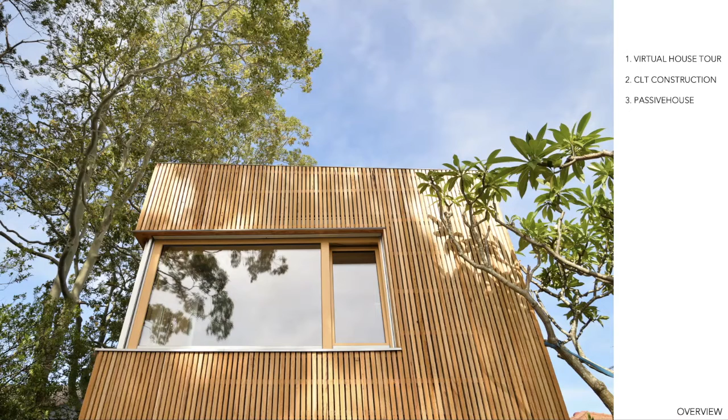In this presentation, I will first cover a virtual house tour of the finished project, then show you more detail about the cross-laminated timber construction, and then add all of the additional details which turn this house into a passive house. We start with the site.

The project is located in Balgowlah, northern suburbs of Sydney. As you can see, there's an existing house in the front, which is the 1920s Californian bungalow, and the addition has been installed in the backyard.

The form was very much determined by the need to retain the existing gum trees. You can see it's quite densely populated with trees. It is obviously been a bit of a challenge to fit the extension in there.

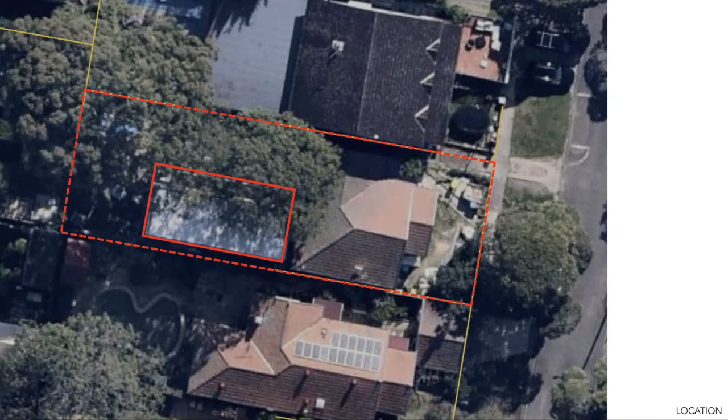The crane during installation was standing on the road, reaching over the existing house and then lowering all of the elements into the backyard.

Again, this is the overview of the site with the existing house at the front and the extension at the back. The extension is about 110 square meters.

On the ground floor, we've got the new main entry to the building with this little link which connects the old and the new part.

You've got the stair going upstairs, kitchen area, dining and living, and external terraces. On the upper level, we have the study and a bathroom, a walk-in wardrobe, and the master bedroom.

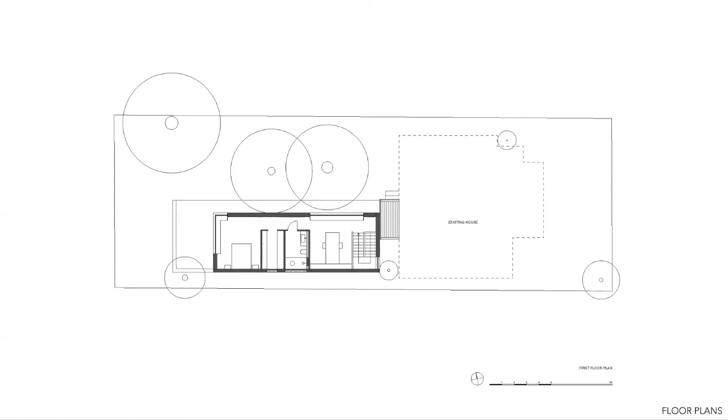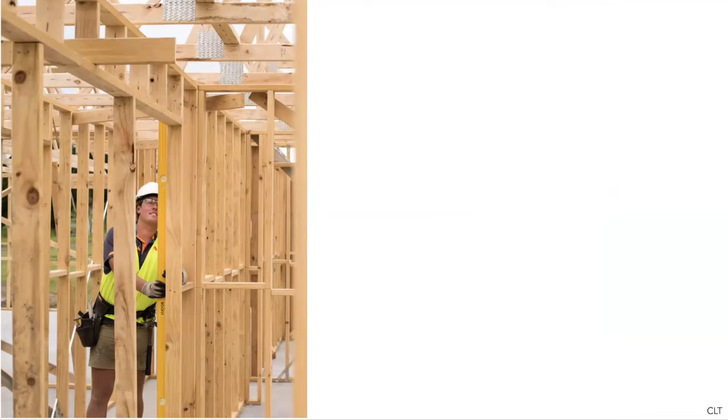Now I'm going to explain you a bit more about the cross-laminated timber construction. That was the method for this project. So everybody knows about timber framing as sort of a traditional residential construction, and everybody knows about concrete tilt-up prefabricated systems, which are sometimes used in commercial arrangements. And cross-laminated timber really is sort of a combination of the two systems.

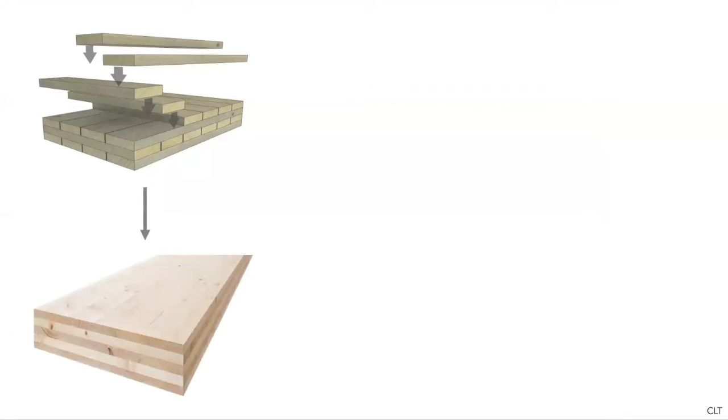So cross-laminated timber consists of timber boards which are glued together at 90-degree angles and then form a solid slab. This slab can be used in all different types. It can be pre-cut, windows can be added. We've got smaller elements, long elements, and they are then installed on site.

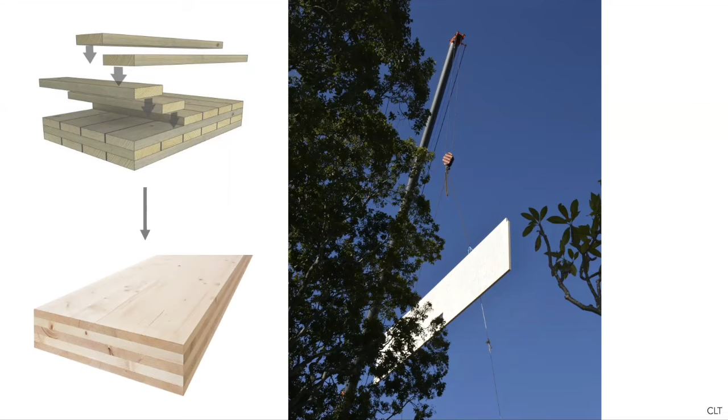This is a view of the crane lifting one of those 11-meter long panels over the existing house into the backyard.

So why did we use cross-laminated timber for this project? There are a whole lot of reasons to use that. Part of it is the quality of the finished product. It's prefabricated to a high standard in a controlled environment, and particularly in combination with passive house, this is of large importance for the airtightness of the building, in my view. So you can use the CLT as an airtight wall or slab or roof, and instead of adding an additional membrane to achieve the airtightness, you can tape the joints to achieve this.

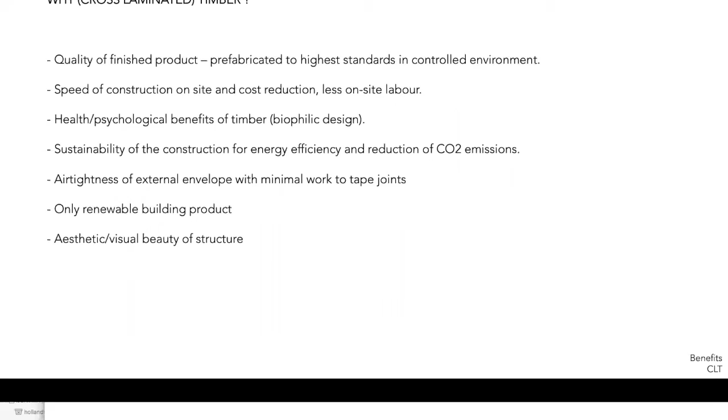So why did we use cross-laminated timber for this project? There are quite a few. Obviously, the quality of the finished product is prefabricated to the highest standards in a controlled environment, which in combination with passive house is very important if you think about airtightness. All of the CLT walls and slabs are airtight within themselves, so you only need to tape the joints to achieve the full airtightness here.

There's a speed of construction on site and associated cost reduction. There's less on-site labor. Obviously, health and psychological benefits of timber, generally thinking about biophilic design, the sustainability of the construction, both for energy efficiency, taking advantage of the timber's thermal properties, and the reduction of CO2 emissions. It's essentially the only renewable building product, timber. And obviously, there's also the aesthetic and visual beauty of the structure itself.

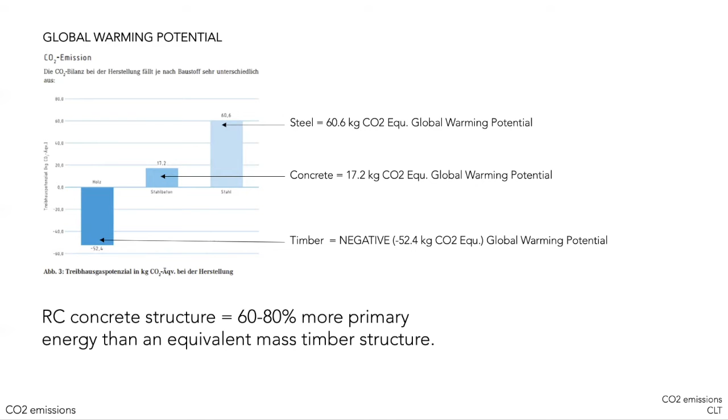If you look at the global warming potential of mass timber structures and compare that to more traditional structures, maybe not in the residential environment, but generally in construction, you compare it to concrete, a concrete structure of the same size, same type, would have 60 to 80% more primary energy used than an equivalent mass timber structure.

And then coming to the argument about transport, because the CLT that we've used here is coming from Austria. Transporting something 12,000 kilometers overseas on a ship in a container is the equivalent in CO2 emissions to transporting something above land with a truck. That just puts it into perspective overall.

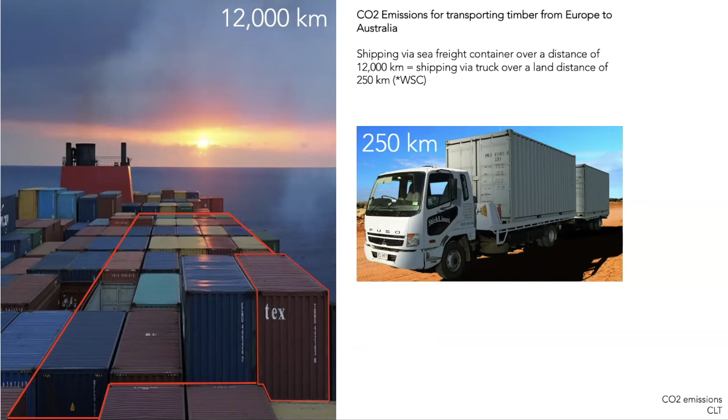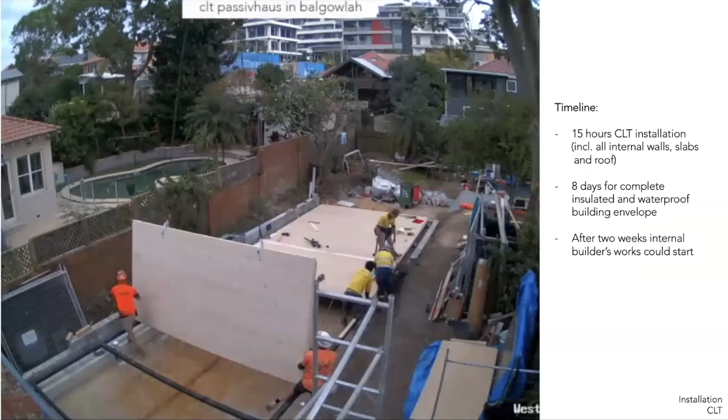This is now a time lapse of the installation of the Balgowlah passive house. You can see the floor panels put in place. There's a crane standing behind us, reaching over the existing house. You can just sort of see some tiles at the bottom left corner. So you can see it's pretty close to the boundary on the left side, and the neighbor was rather difficult, so it was really important to not pass over his airspace. And on the right side, you can just see the edge of those large gum trees. So very restricted site, but it went incredibly smooth.

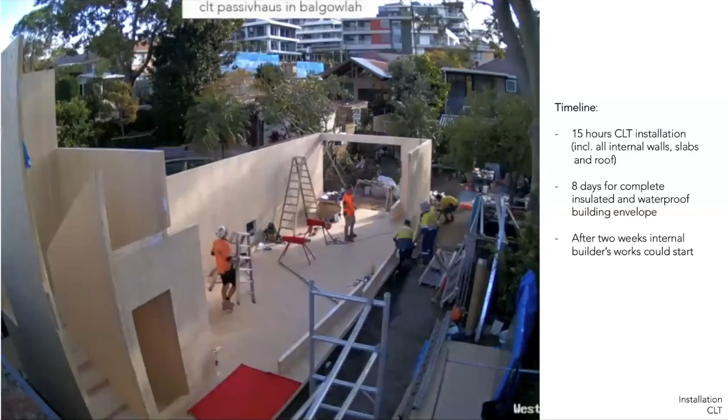You've just seen the large 11-meter panel being installed, and essentially the part that took the longest was the area around the stairs. So the stairs were prefabricated. Within the slabs, we also had the prefabrication for the conduits. The lighting cutouts were already included, and now you can see the next level going up. The whole structure was installed in 15 hours, but spread over 2 days because of council regulations and the time that it takes to set up the mobile crane and pack it all away again.

Overall, after 8 days, the entire structure was complete with the insulated and waterproof membrane installed and ready to essentially go into the interior and start the external cladding after 2 weeks.

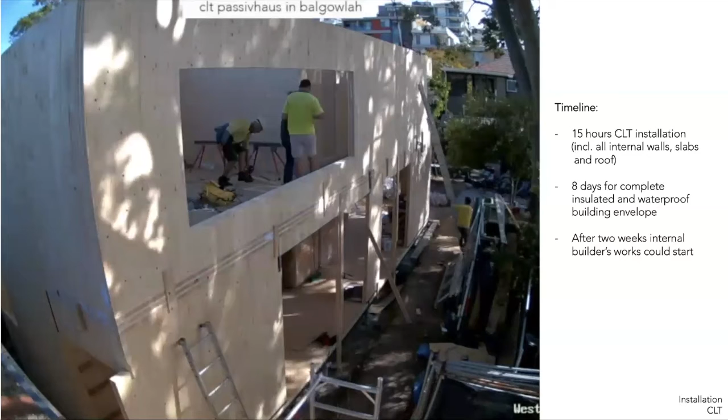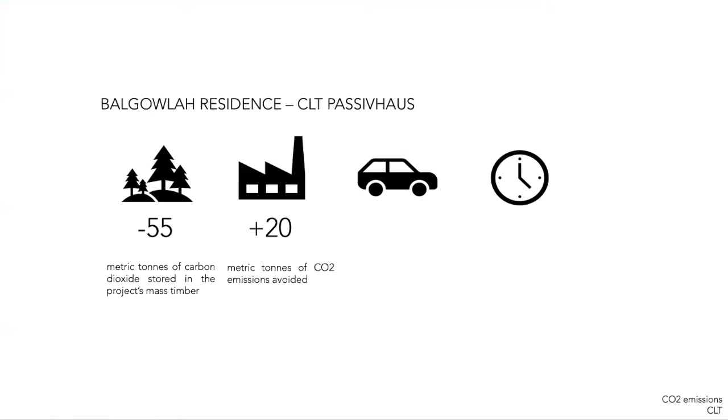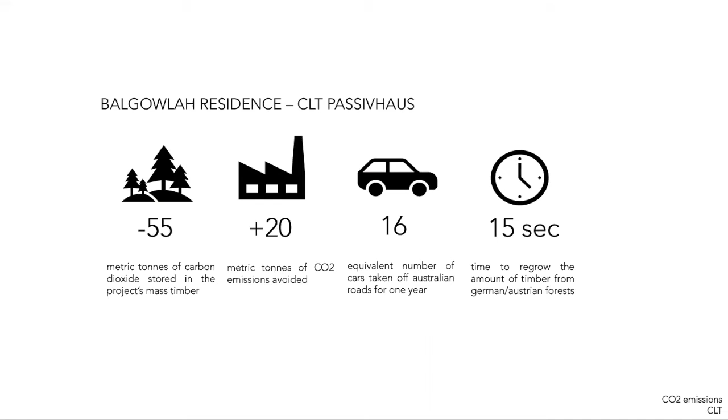Just some stats about the CO2 in this project. Generally, this project has stored 55 tons of carbon dioxide in the mass timber structure. Compare that to a traditional build, which would have emitted 20 tons of CO2. And that's an equivalent of 16 cars taken off the road for a whole year. And just another fact is essentially the entire timber structure is regrown in just 15 seconds.

Continuous thermal insulation across the entire building. We've used a wood fiber insulation with a lambda value of 0.038. We've used Schneider and Gutex as the insulation for the roof and for the walls, and we've used an XPS for the underside of the suspended slab. U value for the walls is 0.25. For the roof, we've got 0.18, and for the slab, we've got 0.35.

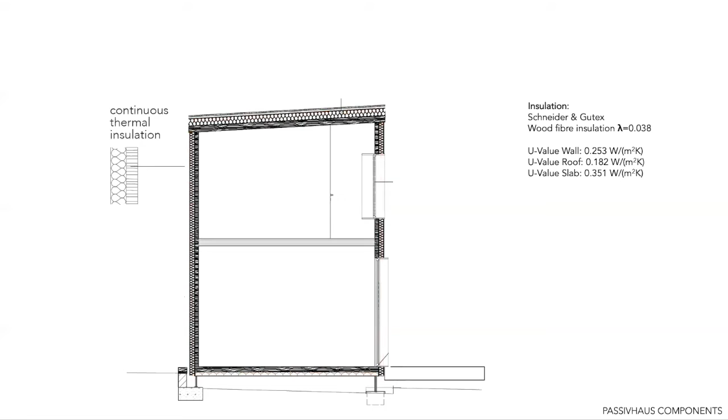The airtightness of the entire house was achieved by using the CLT components for the walls, the floor, and the roof, and only taping the joints with a Tescon Extora tape to achieve the airtightness. The initial airtightness test achieved 0.33 air exchanges per hour.

For the windows, we've used Döpfner timber frame windows and triple glazing from Saint-Gobain. U value of the frame is 1.02 watts per square meter Kelvin, and the glass is 0.72 watts per square meter Kelvin. As an external shading device, we've used external aluminium Venetians, retractable and adjustable.

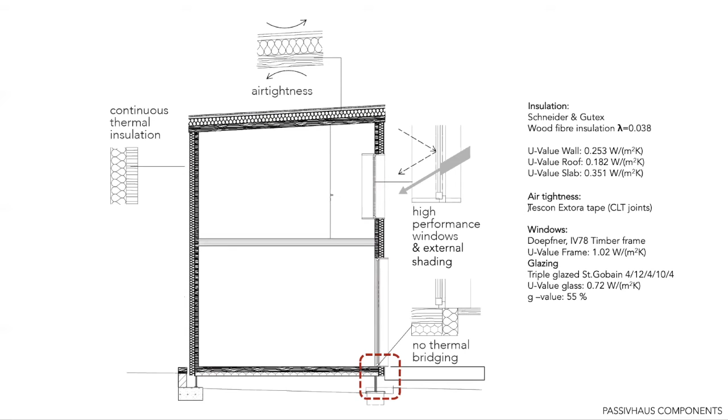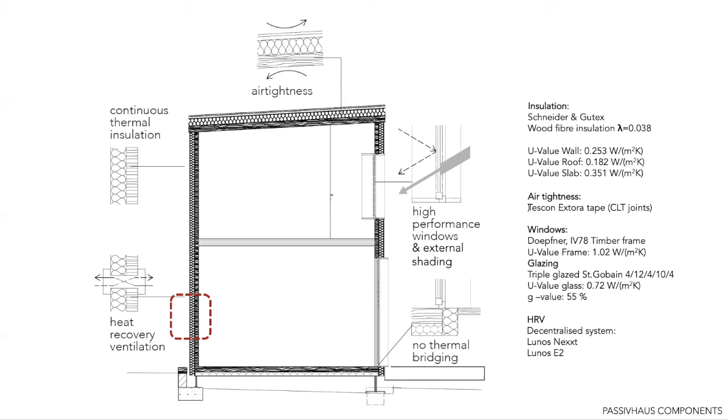Obviously, thermal bridge-free design or optimization has been used for the project. And the heat recovery ventilation used here was a decentralized system. We've used the Lunos Nexxt and Lunos e2 modules, which I will go into in more detail later.

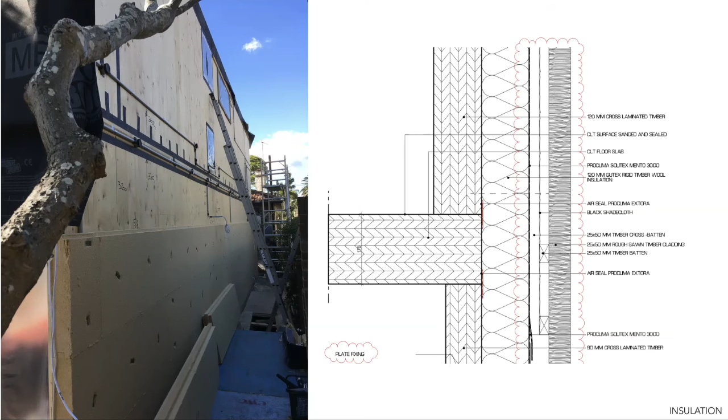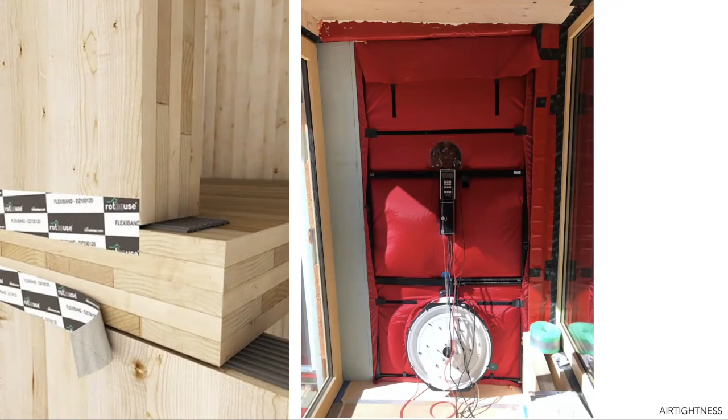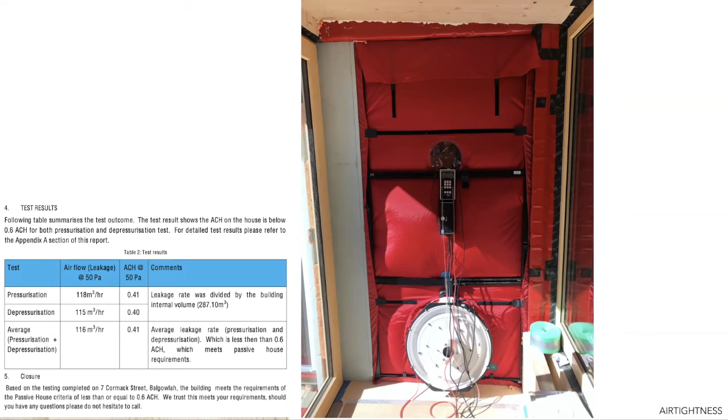Air tightness testing, as I mentioned, was done initially and achieved an air tightness of 0.33. The final air tightness test achieved an air tightness of 0.4. The reason we found out why that was a bit less than originally was actually the door connecting the existing and new building, which we adjusted later. So I assume now it's probably back closer to the 0.33 rather than the 0.4.

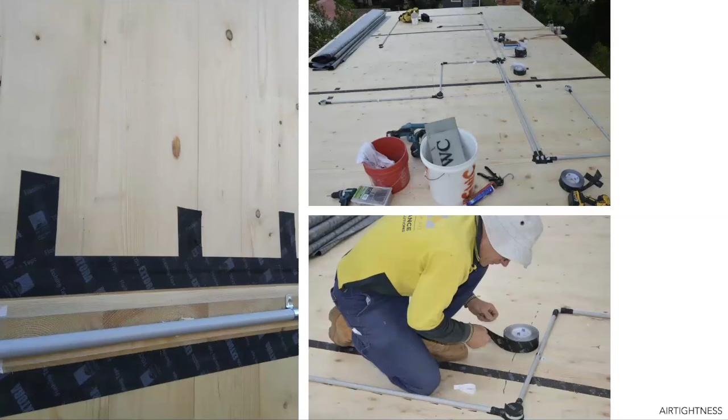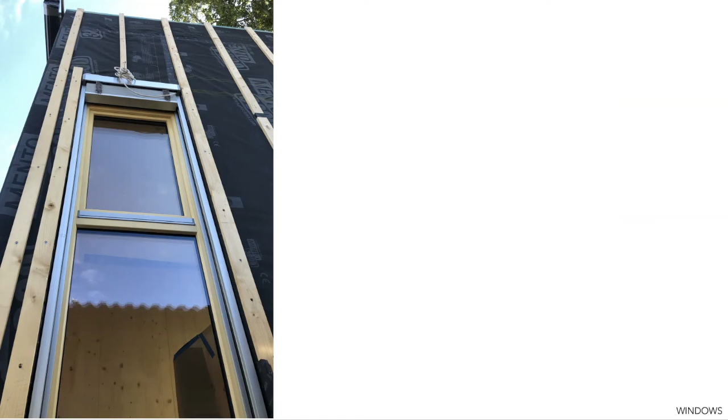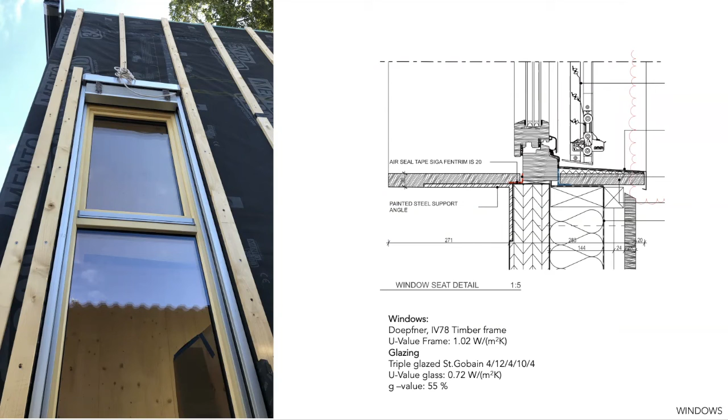And if you look at the cross section, obviously, ideally, the window would have been pushed out a bit further. And the main reason why it's sitting in this location is because of the external shading, which was integrated within the external cladding. The thermal bridge analysis, though, showed that this was all still working.

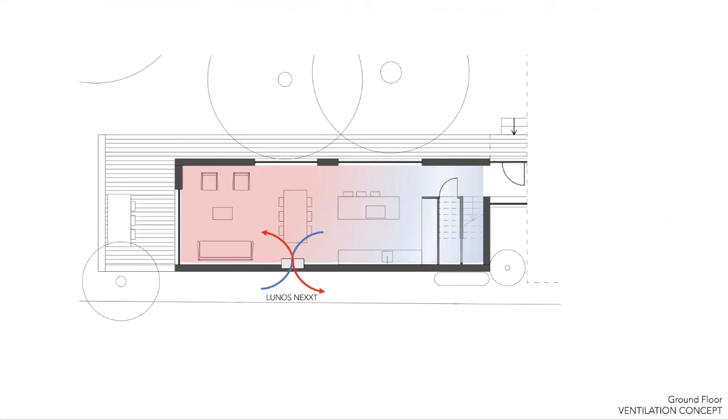Coming to the ventilation concept, as I mentioned, we've got a decentralized system here. On the ground floor, we've used a Lunos Nexxt with the air in and out through that heat exchanger. So one of those Lunos Nexxt systems is taking care of the entire ground floor. And on the upper floor, we've got another Lunos Nexxt, which is installed within the walk-in wardrobe, and it extracts the air out of the bathroom via ducting and pushes it into the bedroom via ducting as well.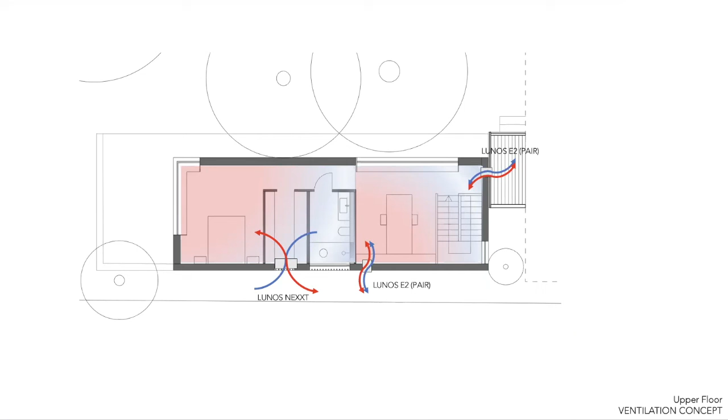There's another one which is taking care of the more open part of the house, the Lunos E2. They work as a pair, so there's one diagonally across the room there, and they work in tandem, and they change direction in certain intervals. On this level, we also have the cooling installed, so that's installed near the open stairway so that the air actually gets circulated across the entire house in that location.